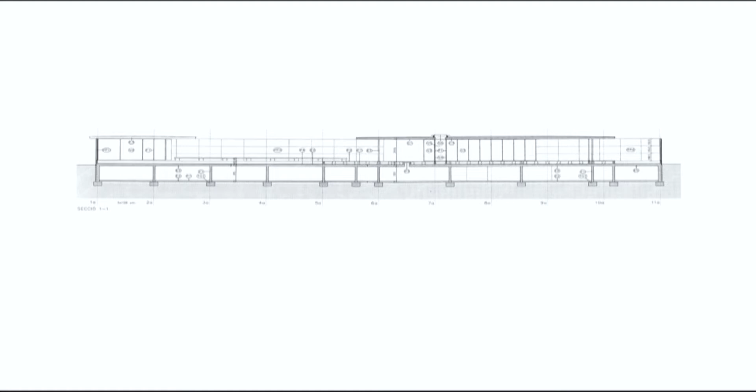So that's what is intriguing for me. Why we inherited a culture that is heavily entangled within the social, within the ecosystemic, within the political, but architecture is equipping itself so that entanglement remains hidden, invisible. It's like if architecture was evolving in a way that power needs to be invisibilized.

And I think that it has to do with a way, of course, of removing power from others, from the employees, for instance, that they have to do like if they didn't need a microwave oven, like if life was not composed by them. It's a process of removal, actually, of a big part of the society that therefore becomes, let's say, invisibilized. This is, for me, the kind of alliance that the Barcelona Pavilion is part of.

In order to preserve this kind of fictional image, it needs to remove a big part of reality so that it becomes kind of an invisibilized reality. But what does it imply? How does it work? What does it mean to be a body that is subsidized by another symbol, by a symbolism that invisibilizes you, that avoids to express you, to manifest your presence?

This is for me the most important part of the basement, I would say the most important part of the pavilion. I think that if we had to find the moment in which the contemporary dimension of this pavilion most clearly manifests, it is here. Not in the Kolbe sculpture. You remember this Kolbe sculpture of the Morgen, the woman that is raising her arms to prevent the sun from reaching her eyes.

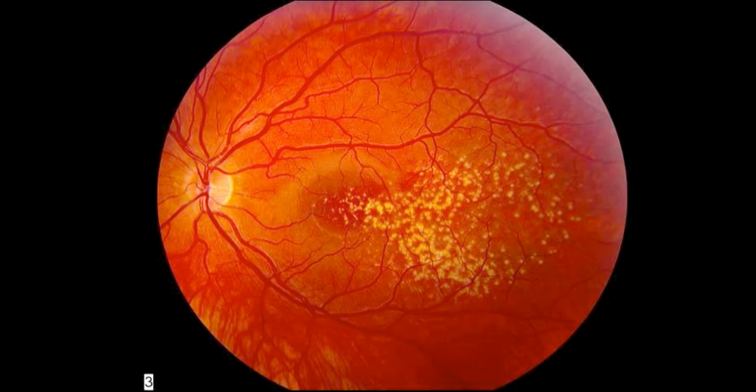And for me, if we want to stop here and reflect a little bit on what it means, we see that architecture is very different to what we have been told. Architecture is not the provision of space. Architecture is an assemblage. Architecture is not just a box where any form of body or society can be hosted, as is normally claimed through the tradition of minimalism. Architecture is the society, actually.

How is it composed? Through bodies, through velvet, through industries, through many, many different entities that get associated in the way life is enacted. And in this way, architecture is reflexivity. Cat Niebla is constructing the pavilion, but at the same time, she was constructed as part of the pavilion. And this is not just a conceptual process. It's very physical. The anatomy of her eyes was transformed by the way she became part of this assemblage.

Of course, this is something that many people from different perspectives have been reflecting on in the field of STS, the studies of science, society, and technology, through the evolution of actor network theory.

This is something that is being characterized, but also, of course, people that have worked in the post-human field have been characterizing this. People working in the field of political ecology have also been reflecting on these issues. And I think it's important that we understand that architecture is at the center of this reflection, and that we are incredibly important in contributing to understand the way that societies are materially produced, and the way that bodies are directly connected to environments, directly connected to industries.

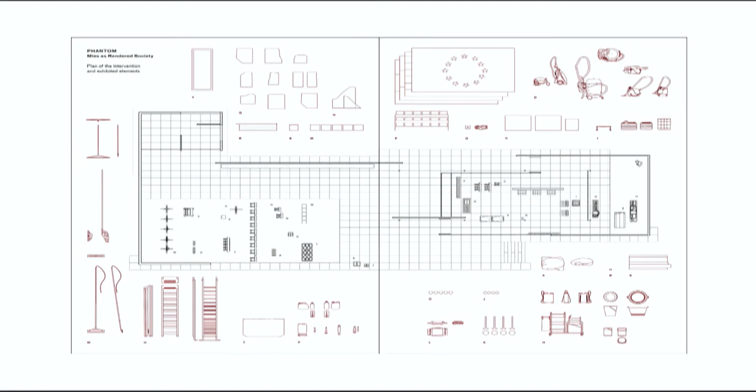And we ended up thinking that the way to operate in an assemblage is through rearticulation. Not so much, for instance, by just taking people to the basement. That was something that we were thinking, but rather considering that we could reassemble, that if we had to intervene something, it is the assemblage that needed to be intervened. And intervening the assemblage was basically to reconsider what should be visible and what should be hidden, not producing the fantasy of a universal transparency, but understanding that visibility is constructed and therefore could be intervened and rediscussed.

For instance, showing the vacuum cleaners that were used by the cleaning staff to remove the water that gets into the holes of the travertine, to slow down the process of the stone breaking, basically totally transformed the hierarchy in the pavilion. The people that were working on the cleaning would then become the curators. They would decide when they would clean, how that would be staged so people could see that process.

Rearticulating is not just affecting the symbolic dimension of the pavilion. It is affecting the symbolic dimension of the pavilion, but also the daily life and the hierarchies that the assemblage, the pavilion, exists through, exists by, exists as. And Kolbe's sculpture, as you see, lost its importance. It was no longer important. Other bodies that could start to become visible here were much more important.

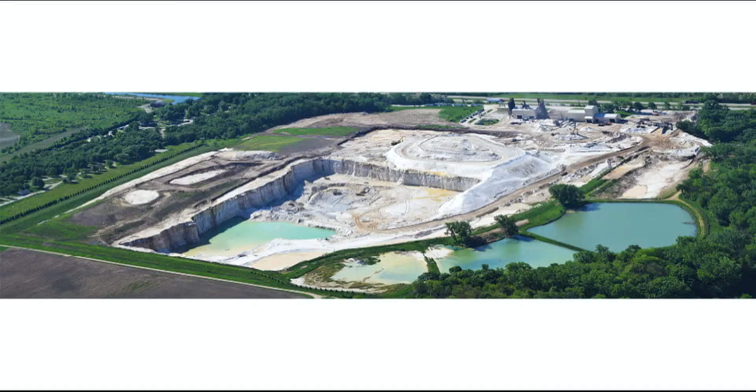What's interesting is what we can learn from the very different ways humans took advantage of this particularity of silica. In the past, it was basically celebrated and used as a particular ecosystem where people could hunt and develop a sustainable relationship with more-than-human forces of life. Toward the end of this culture of extraction, silica became a possibility to create inequality and segregation, to further a culture of exploitation.

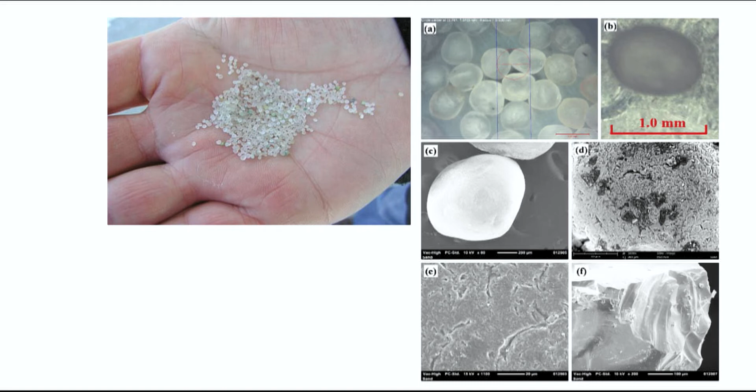But when we see this, it's also related to fracking. There's no way to produce ultra-clear glass without fracking. The development of the glass industry in Pittsburgh was directly connected to the exploitation of natural gas in the Susquehanna Valley and other parts of the US. Ultra-clear glass exists because 73% of the energy used to produce it comes from fracking.

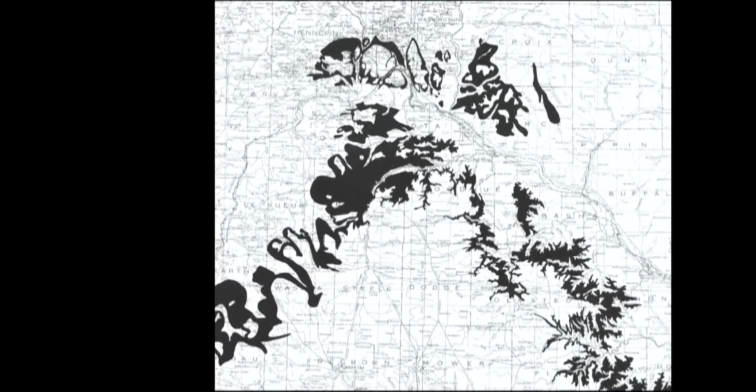Very rapidly, though we could go into much more detail, the extraction of gas in the Susquehanna Valley is directly connected—I've worked for many years with activists and organizations there who have surveyed the damage produced by fracking—and there's more than 30,000 miles of aquifers that have been polluted through fracking.

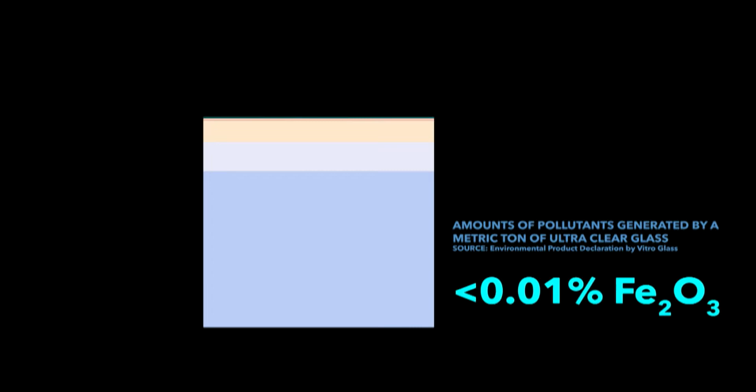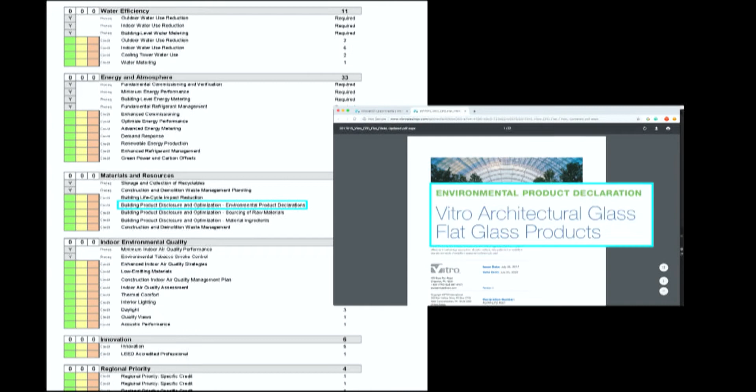Basically, this glass is directly connected to a project that redistributes toxicity territorially. I'd like to get more into detail, but first I must say it's paradoxical that our culture as architects is not identifying or detecting what's happening with this glass. Using ultra-clear glass automatically gives you 2 points in LEED certification.

So the way we evaluate sustainability totally fails to understand how architecture operates across different scales, and how putting a piece of glass here means something happens in Susquehanna or something happens in Illinois that we have to take into account. These seals used to evaluate sustainability don't operate transcalarly, and are therefore useless for identifying ecological impact. We have to understand that architectural detailing is a form of socio-territorial recomposition.

That's what I want to claim: there's no divorce between design and society, or eco-society making. Architectural detailing is political—it's an assemblage, a site of assemblage that requires an assembly.

This is actually a space, a site of political action, namely segregation, as it is this one. And this is directly connected to particular policies that were well-intended but ended up having a very problematic outcome.

This is the presentation of the 2011 Clean Heat project by Michael Bloomberg, by which he promoted and incentivized the transformation of boilers in New York from oil-fueled boilers to natural gas fueled boilers, the Clean Heat project. It came together, or very close in time, with Cuomo's banning of horizontal fracking in New York State, which is something that, of course, should be celebrated, in my opinion.

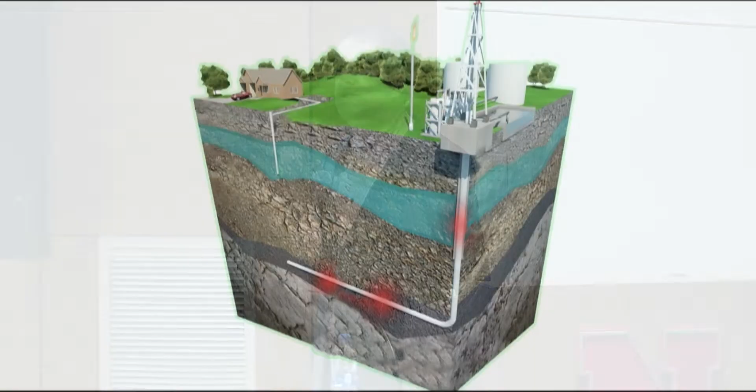I'm against fracking because of the damage it produces to societies, to governments, to the environment, and to personal lives. But when you put it in context together, the Clean Heat project and the banning of horizontal fracking in New York State meant that fracking was basically allocated to Susquehanna Valley in Pennsylvania, and the pollution, the NOx of New York, was moved to Susquehanna.

This is the presence of NOx before the Clean Heat project, and this is the way it moved to Susquehanna. The reason is that, as opposed to oil, natural gas pollutes at the point where it is extracted, not so much at the point where it is burned. It also pollutes where it is burned, but much more where it is extracted.

So by moving from oil-fueled boilers to natural gas-fueled boilers, Bloomberg's administration, combined with Cuomo's banning of horizontal fracking in New York State, resulted in a displacement of toxicity from New York City to a neighboring state, Pennsylvania, which would then start having air alerts annually.

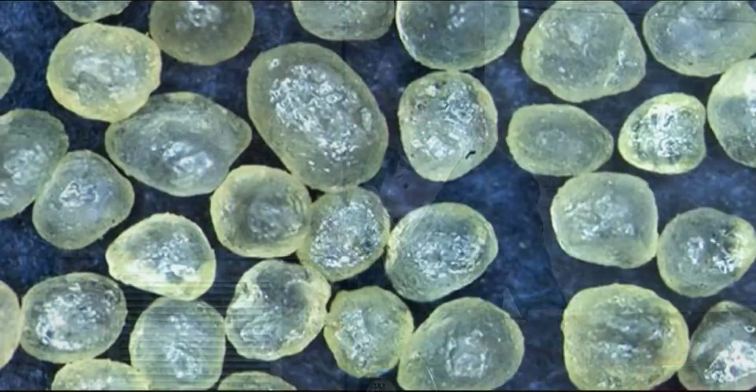This is, in my opinion, what we need to understand when we look at the 432 — when we look at the views from it, it's not only this flamboyant guy looking at the earth that he owns. Owning the sky means that others are not owning it.

Like the cat Niebla is not part of the upper part, it's kind of the victim of the making of this illusion. There are other victims of this. The blue sky that is owned in Manhattan means basically that people have their water mixed with methane.

And that's what I think is important. When we see the way this reality, the gas in the Marcellus shale, manifests to the people who live on top of it, you perfectly see how they are the victims of a system of invisibilization.

This is the way the Marcellus shale is expressed to those who are invested in it, those who can own it. Owning the view is very much connected to owning also the mineral assets that are underneath the people who live in Susquehanna Valley.

This is the way Predix — as fracking wells are drilled, there are digital sensors in the drilling bit that are collecting data. So fracking is not only profitable because gas is extracted, but because it allows a mineral resource to be turned into an asset, consolidating information about it so it can be marketed.

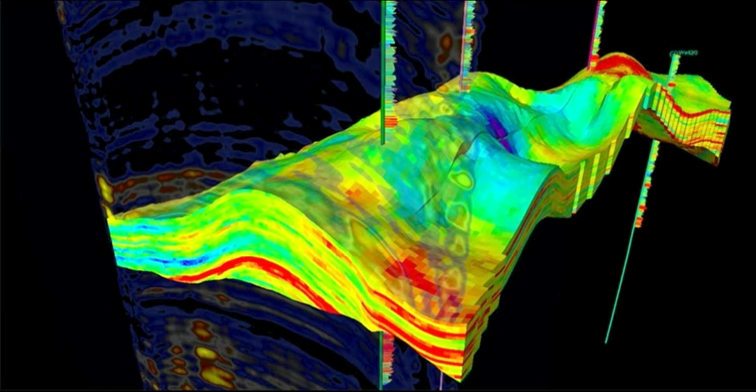And therefore it optimizes its capacity to become an investible, tradable commodity that can be traded in the global markets. These are the different representations provided by Predix, the software that allows those investing in mineral assets to make decisions on how they operate their investments.

How many people here have Predix on their phones? Does anyone have it? Do you know it? Predix? Okay, that's kind of the basement — that's the invisibility. Predix has more employees than Google. It's a huge company working with natural assets around the world.

But probably none of us has access to that reality. So we see how those divides are directly connected to the making of architecture now in a very clear way. This is, for instance, the way you see those different lots on top of the mineral asset. Basically, those two realities are disconnected, as the two stories of the Barcelona Pavilion are. And this is something that is being constructed through spatial practices.

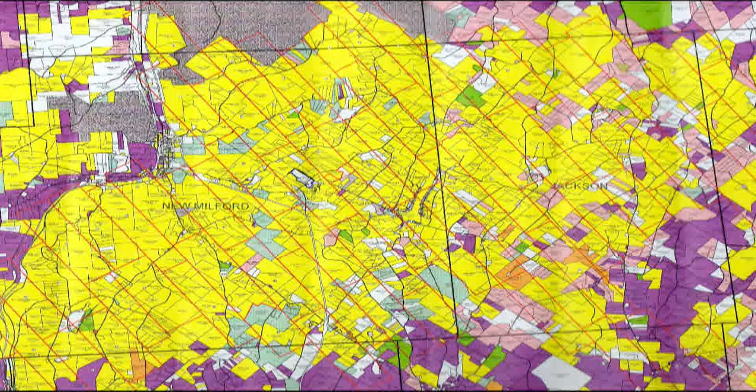This is a map we got from a landman who for years had been acquiring mineral rights in parts of Susquehanna Valley. You see how progressively they were accumulating yellow lots — those are the ones that already sold their mineral assets, their mineral rights, to Cabot Oil Company. So they're consolidating, out of these tiny fragments, a huge property underneath the houses.

This is all interconnected, all very directly connected. There's no glass that allows you to really experience owning the blue sky that has already been edited by Bloomberg through the transformation of the boilers, that can be owned by people who can hide the properties of these apartments, working to ensure this blue sky for those apartments through redistribution of toxicity territorially. We can only understand how all these things are connected if we understand architecture as an assemblage, and understand how it operates transscalarly, transmaterially, and transmedium.

Those transformations are crucial for us to understand how architecture is political, how design is political, and how architecture is never done by one single actor. It's the association of many different figures of design. And it's in those constellations of figures of design—policies, energy projects like the Clean Heat project, material development like the ultra-clear glass, systems of exploitation like the exploitation of gas and its channeling to the glass industry—all those different figures of design come to be assembled to produce a political effect.

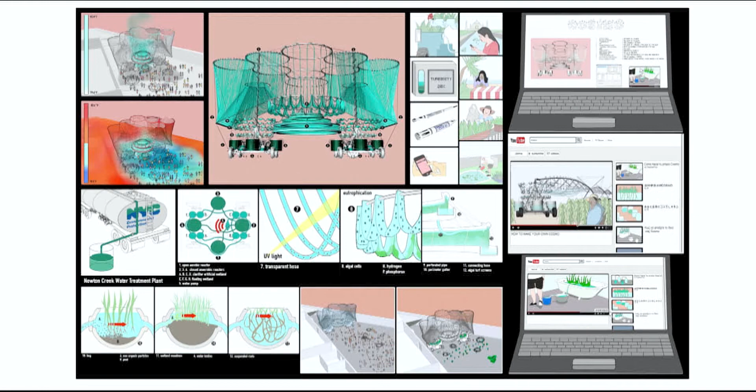We also, in collaboration with the Brooklyn Botanic Garden—we always do our projects the way Bloomberg connects different agencies; in a humble way, we also try to work with many other people—we worked with the New York Environmental Department and the Brooklyn Botanic Garden, and together with them developed a manual for anyone to construct their own Cosmo, which was the name of this project. I keep in touch with more than 15 people who have Cosmo machines in their gardens now, and when we dismounted this device, we gave pieces of it to different people who keep them running.

This is the second project. I'm going to be slightly faster now because I would like to show that there's a way for architecture to be practiced that can intervene in little pieces of the things I've been mentioning in the previous discourse.

The first one is we can really demonstrate, and by demonstrating, probably introduce already the possibility of an alternative when it comes to confronting the use of the distribution of toxicity as a means for environmental injustice.

But this is, for instance, a project that we've been doing for many years, to do an embassy of the ocean in Venice, in Campo San Lorenzo. This is the old church of San Lorenzo, and we have a long-running project for it to become a parliament of the More Than Human Alliance of the Ocean.

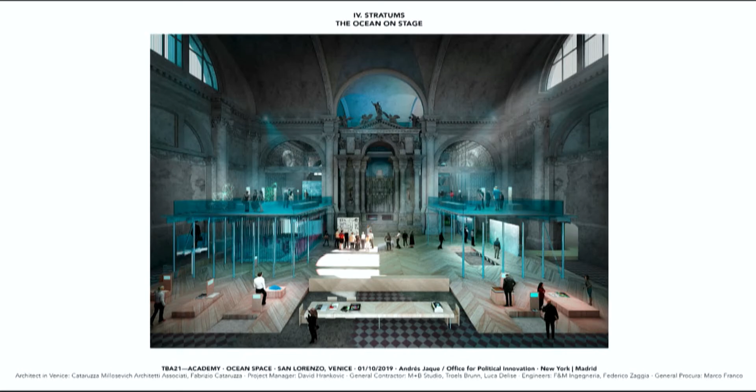This is something that is very much already present in the building. The building can be seen already as a cosmology, but we want to reprogram the building as a cosmology that goes beyond anthropocentrism. And we're doing this working with TBA21 Academy, which is a nonprofit organization that is devoted to the connection of scientists, activists, and artists to advocate for non-human life in the oceans that is, as you know, severely damaged now by many different ways of industrialization of the ocean.

And we develop an accumulation of transformations in this place to allow for many different forms of more than human advocacy. One of them, for instance, is to bring back many of the ecosystems of the lagoon that were removed from Venice through the Napoleonic urban transformation of the archipelago of Venice. The use of many different architectural techniques was intended to remove many forms of life from Venice that were very important to the kind of life that was developed then, even to the way contagious diseases were spreading, as Ivan has been studying.

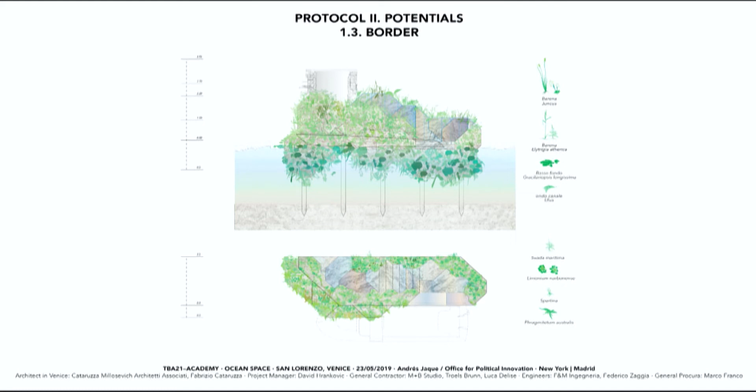And for instance, we went to the tiny scale of what is called in Venice the green line, the border of the water of the canal, the line that is expressed through the moss and the different species that appear on the walls. We basically developed an architecture that would allow us to nurture those species. If we see images or depictions from the time before the Napoleonic transformation, we would see how many species have disappeared that were fundamental for the ecosystems of the lagoon.

But probably the most important part is this Parliament of the Ocean that we've been developing for years now with technologists, with interface designers, with scientists, with artists from TBA21, that is working together with a series of boats that are distributed around the world to be live mapping realities that are critical about the ocean. For instance, one of the projects being developed to be managed from here is the tracking of the evolution of deep sea mining around the world in the ocean.

The idea is to provide this chamber that could allow us to claim what is happening to the ocean now, giving visibility to it and convening decision makers with artists, with activists, with scientists to advocate for the ocean. But also the evolution of biodiversity, the displacement of sharks that are changing their habitats, the effects of climate crisis in the transformation of the habitat of mackerel, for instance. All these are issues that are being discussed, researched and advocated for by TBA21, and that require a chamber where they can become visible and therefore the activism can be stronger.

This is a different project that we're completing the construction of now in El Encinar de los Reyes in Madrid, which is the Reggio School. The Reggio School is an attempt to challenge hierarchies and hegemonies in education from elementary school to high school, and instead replace that by an architecture that can incorporate a large diversity of situations, of environments, of climates, so that instead of having a curriculum, it's the daily exposition to diverse situations that provides opportunities for group self-education.

So the architecture is crucial in the Reggio Emilia methodology; we've been working with these teachers now for 5 years, and the project is close to being completed. The idea is that basically the building becomes an ecosystem that cannot be designed in terms of depuration, but instead of accumulation of diversity. There are areas that are climatized, other areas that are not climatized. There are rooms that are radically different to others.

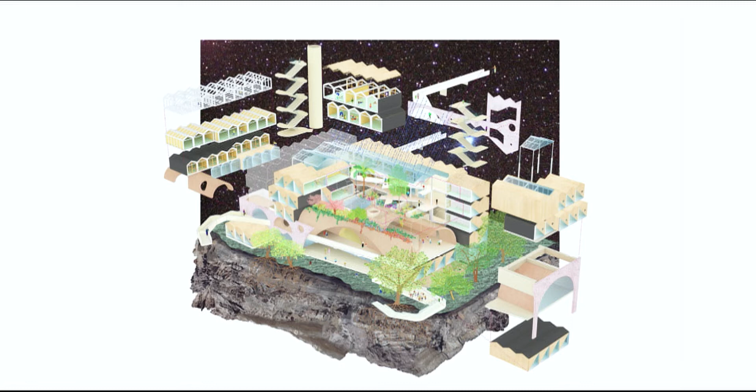There's a presence of all the ecosystems in the area. For instance, we made a huge effort not to cut any tree. We removed the ones that we needed to remove to use the lot in a way that would allow us to host the volume that needed to be constructed.

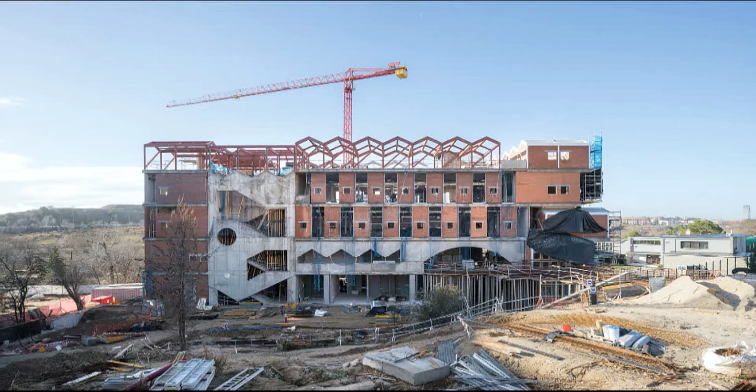This is the way the section of the building looks like. You see how the effort is really not to depurate or, let's say, bring purity or cleanliness or anything like this to this building, but rather to allow it to become a cauldron that intensifies diversity. This is the way it looks now, or actually a couple of months ago. It's almost finished now. It's also, as you see, an accumulation of different forms of architecture.

These veins are carved lines that are carved by heavy rainfall that accumulates in a few days. So basically it's a very dry, flat landscape that has all these veins of eroded paths for the water that are normally dry, but when it rains, they accumulate the water. What is important of these ravines, these ramblas, as they're called in Spanish, is that in a place that is mostly dry,

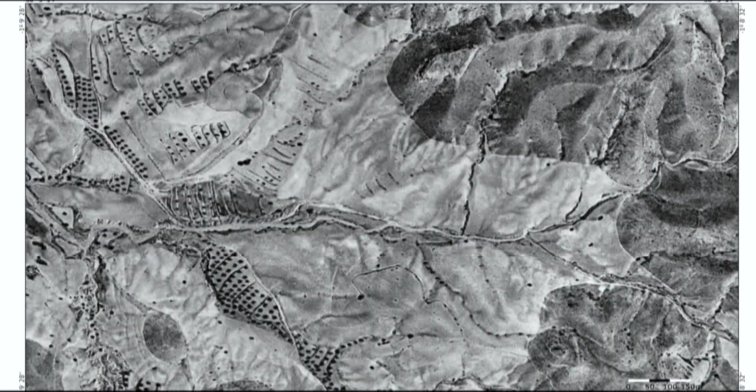they accumulate corridors of life, corridors of biodiversity, corridors where the water is retained for a longer part of the year, and where animal life, insects, fungi, bacteria accumulate. This is a photograph from the 1980s where you see the way this kind of massive urbanism has been growing by flattening the land and therefore covering those carved veins, the ramblas, the ravines, and making them disappear.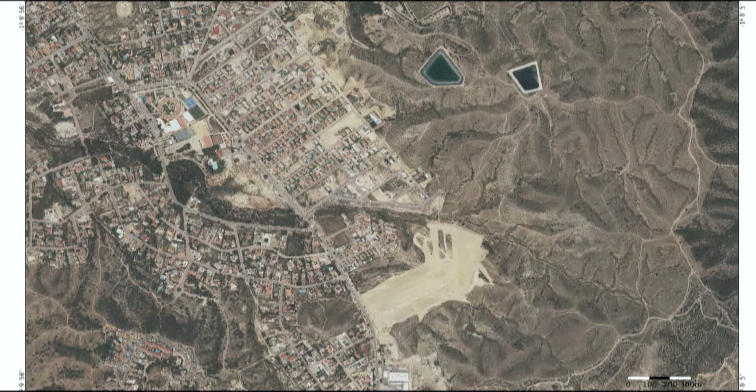By doing that, they've destroyed the biodiversity of the area, also destroying their climatic role or the effect that they had as climate actors. This is the beauty of the Rambla. They are incredibly beautiful. You see there, this is when they don't have the water, but they retain this vegetation. All this has disappeared in most part of the Murcia territory, very sadly.

This is the house that we designed, and the house is built on top of a tiny fragment of a Rambla that still exists, but that is a dying Rambla. We are in a region where there's no political will to address issues like the degradation of the ecosystems. Most of our projects come from very weak positions, and we use them as devices to create a public awareness on a particular issue and to promote changes among actors that could be sensitive to it.

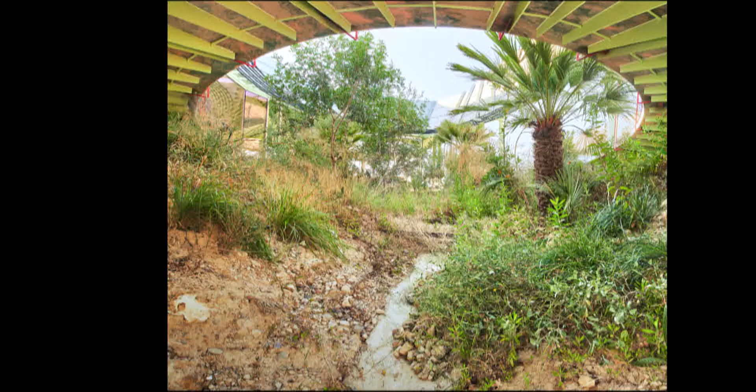So we believe that there's a possibility of working with individual people and growing a kind of grassroots movement to recuperate the Ramblas just by using the gray water of individual houses. So what we did is design this house so that the gray water of showers could be channeled to this ravine, this tiny fragment of the Rambla that of course is connected with the rest of the dying Ramblas. These are photographs after 2 years of the house functioning. And this is the way the gray water of the house is recuperating the Rambla.

Our idea is that there's a possibility for an architecture that is not catering to humans alone, but is catering to humans as part of larger entanglements of life, of more than human life. Understanding that a house that takes care of humans needs to take care also of the way that their life depends and is interconnected to the life of others.

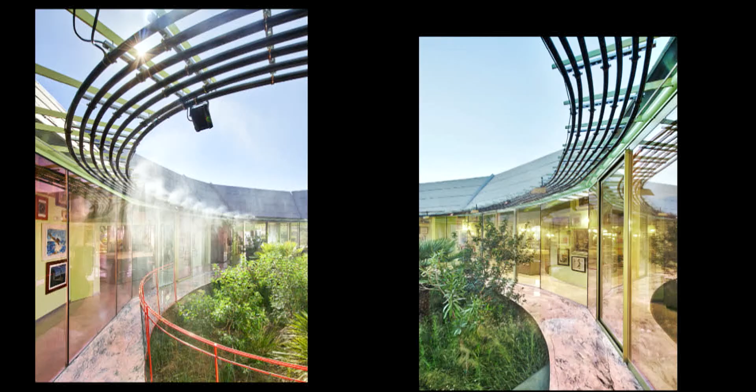This way of doing it is in a way for me understanding also architecture as something that needs to take care of larger scales of life, not only those that live inside the house, but also their dependency on life that happens at other scales, like the scale of the Rambla.

But of course, in the same way that we see how the architecture of abstraction mobilizes aesthetics and makes visible particular realities, we wanted this act of using the gray water to nurture this more than human life of the Rambla to also be expressed clearly in the house, so it becomes something that the house makes visible.

And in order to do that, we created what we call this climatic crown that is connected to digital sensors that are disposed on the soil. And when the soil reaches either a high level of dryness or a high level of acidity, there's this kind of automatic climatology that starts to operate on this piece of Rambla. It's like a life support device for the ecosystem, but also very enjoyable.

It's really exciting to see how this climatic construction operates. You can be there and at one particular moment, there's this water that gets sprayed without anyone touching it. There are other details that I would like to explain. You see here, this is a 20 millimeter marble piece from the area.

This is very important. The house is not climatized. It doesn't have air conditioning in a climate that is very hot. So what we have here, and this is something that comes also from many conversations with Forrest Meggers from Princeton, we were using the capacity of materials to absorb radiation as a way to basically use the contact of the skin with particular materials as a way to refrigerate without energy consumption.

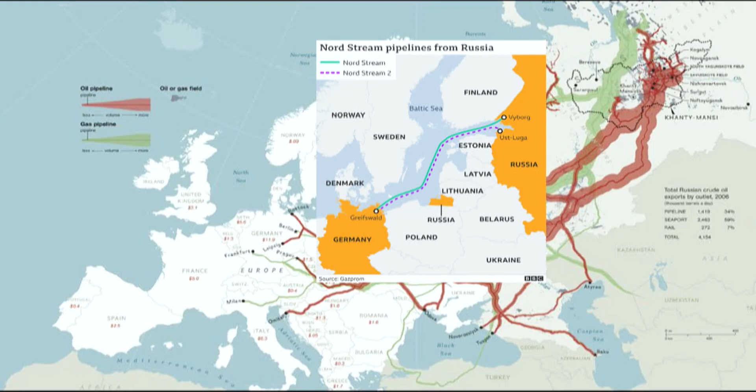These are the Nord Stream pipelines from Russia; to a certain extent the war came because this was getting delayed. "The goal of invading Ukraine is to protect the people that are subjected to abuse, genocide from the Kiev regime, and to demilitarize and denazify Ukraine." For me, it's very painful to read this because the story of the victims of Nazism in Ukraine is very painful.

In particular because one of the first places that was attacked during this war was Babyn Yar, the landscape where more than 100,000 people were killed during World War II by the Nazis and then also by the Soviet forces. We won the competition, I think two years ago, to design the Babyn Yar Museum of Memory and Oblivion, a research center to account for the crimes that happened during World War II in Babyn Yar, in this particular part of Kiev that was bombed at the beginning of the war.

These are photographs that I took in Babyn Yar, but then we examined them with eco-forensic experts. Each of them is telling the story of what happened here. In the first days of the occupation of Kiev by the Nazi forces, they identified that Babyn Yar, which has a landscape very similar to the house in Murcia with ravines, could be used to turn that land into a machine to kill people

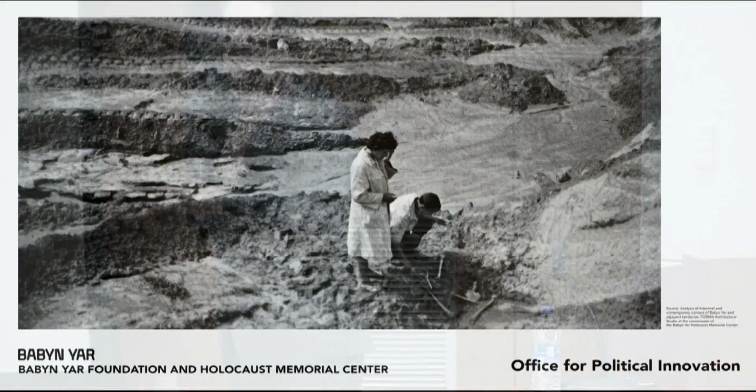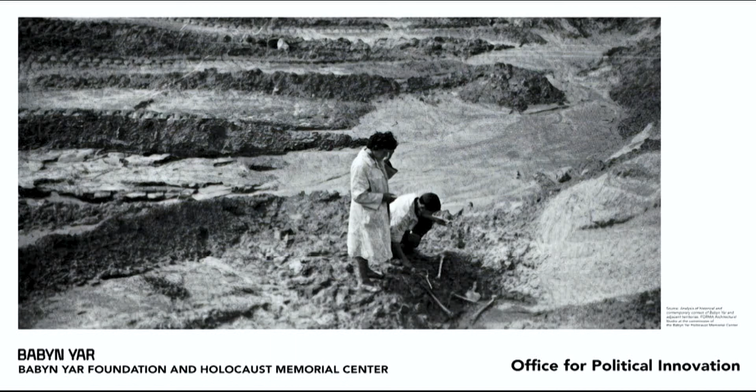There would be a whole, let's say, scientific organization of the killing process that would be done in association with the landscape. These are the first forensic work that was developed there to understand what had happened. The bodies were buried there, but then, when the Nazis felt that they were losing the war, they unburied all these cadavers and they burned them, and that is actually what you can see here.

Forensic ecologists can track the presence of the ashes of humans in the composition of the soil by looking at the species that can grow here. The ecological composition, the cosmopolitical composition of Babyn Yar is speaking of the presences of human debris. And that's something that can be tracked, everything.

The trees were cut to burn the bodies of those that had been previously buried at the time that the Nazis knew that they were losing the war. So the composition of the forest is mostly very young trees that allow us to very specifically track when the tragedy happened and in what areas of Babyn Yar.

Even the presence of animals is telling us about the presence of human ashes in the ground, and only animals that can tolerate that acidity can be found there. When we look at this, we see that there's an entire ecosystem that at all different scales is registering, is composed by the tragedy.

History is not something of the past. The forms of life that happen here are directly imbricated in what happened there during World War II. This is something that is invisible to most people living in Ukraine. And actually that invisibility, that oblivion, is what allows Putin to claim that Kyiv is now a Nazifying regime.

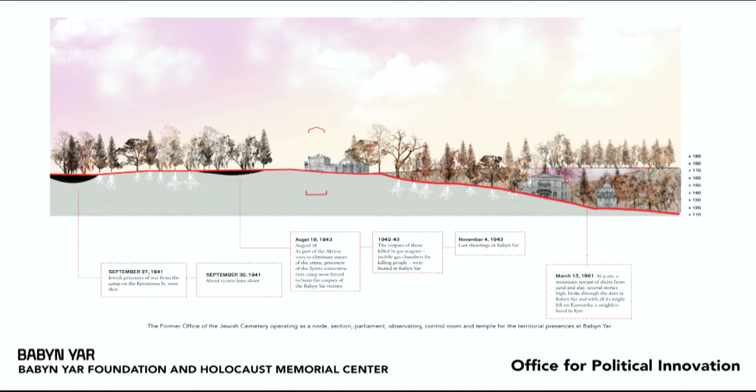In order to produce a history that is unavoidable, architecture was called to produce a research center in this particular place. What we propose is to use the actual materiality that could be found here to allow it to directly express and narrate the story that is still part of the living realities of Babyn Yar. We propose the museum is to be hosted in this existing building.

The reason why it needs to be here is that it's the only place where it can be guaranteed that there are no human remains. We don't want to build in places where there are human remains, so we worked on doing foundations. So basically, the entire museum is concentrated in this tiny building because it's the only place that we know we can work without affecting burials.

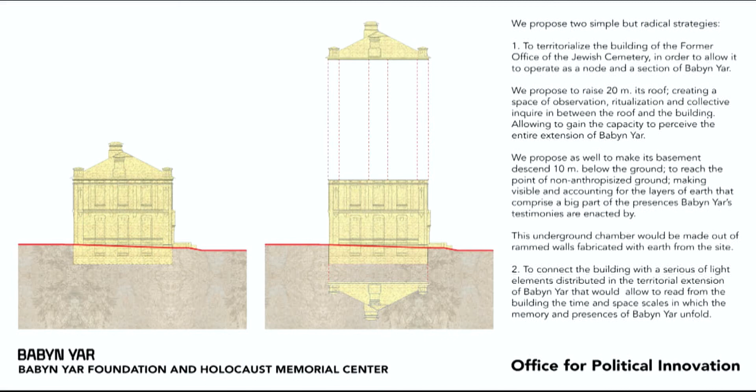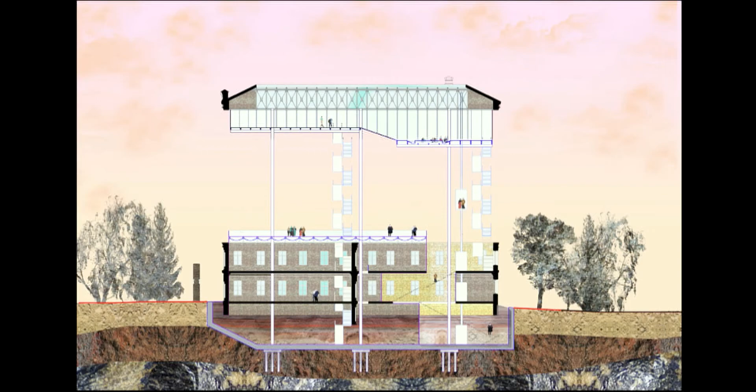But our design was based on the possibility of raising the roof 20 meters and going down into the earth 10 meters so we can bracket the entire ecosystem that is living as the tragedy. Our project is basically expanding the building so it becomes an observatory, kind of an inquiring device, a parliament that allows those presences that are there to speak through research, through science, through art, through debate, through political action, but also through the very act of a building that brackets that reality and embraces it in a very literal way.

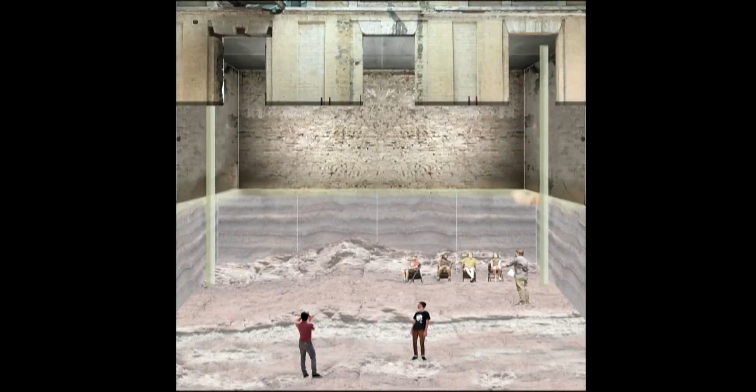But a literal way that, of course, allows us to see the extension of the areas that are not covered by trees because the composition of the soil doesn't allow trees to grow, or to go down into the earth and identify the strata that were transformed by the action of killing, burying, unburying, and burning. This is what I wanted to bring today here.

I believe that architecture is deeply entangled in the making of societies. And it's not just, let's say, a neutral box that hosts the social, but it's actually part of the assemblages. There's no difference between walls, bodies, cuts, toxicity, air, in the way that they participate in the making of reality.

And it's only through new conceptual and practical tools that allow us to operate across scales, to understand how things like ashes in the soil are directly connected to the form of architecture, or that allow us to understand that owning the landscape as a way to produce inequality is constructed through the collaboration of many different forms of design, that we can understand the power of architecture to operate politically, and we can mobilize architecture as a force for activism.